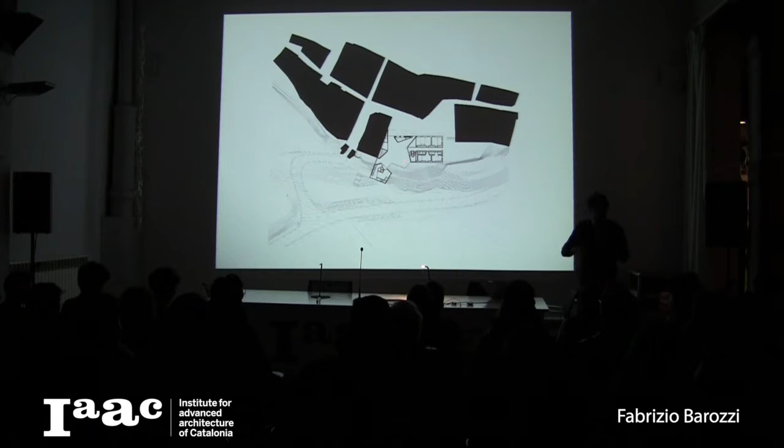And for sure, the other most important thing is that in the middle of the project there exists a public space, a plaza, a belvedere. I will show you more and speak more about this idea of public space.

From the distance, the project is very simple—just an archetypical element that marks the limit of the urban in front of the landscape. You have to imagine we are north of Madrid, in this meseta, in a very horizontal space where there are different towers, different medieval elements. So from the distance, the project is just a transition element, from the urban to the organic.

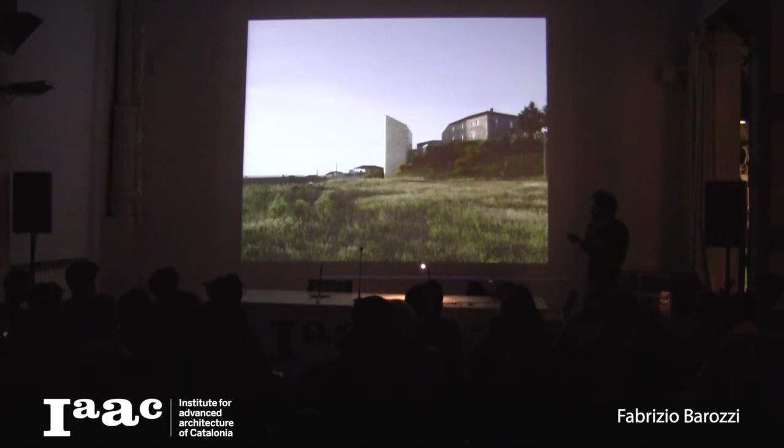What we try to do is interpret this very specific and singular condition of the landscape. With the new element and the old building—where the regulatory council is now, which we also restored—we try to build a fragment of this landscape, so that with the passing of time, the two buildings become a new fragment of this landscape.

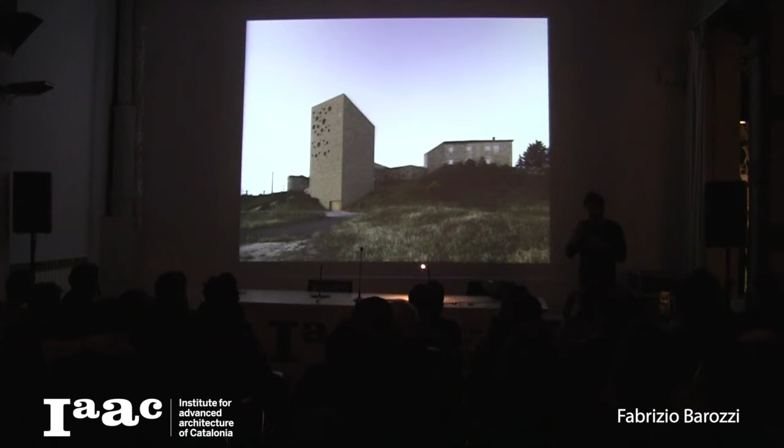If we turn around the building, we start to see clearly the extension and the pre-existing building, and this image makes clear what I've already said: the project tries to be very specific, very contextual, very atmospheric, but at the same time something extraneous from the context exists. The project is also an independent element that tries to forget the same context.

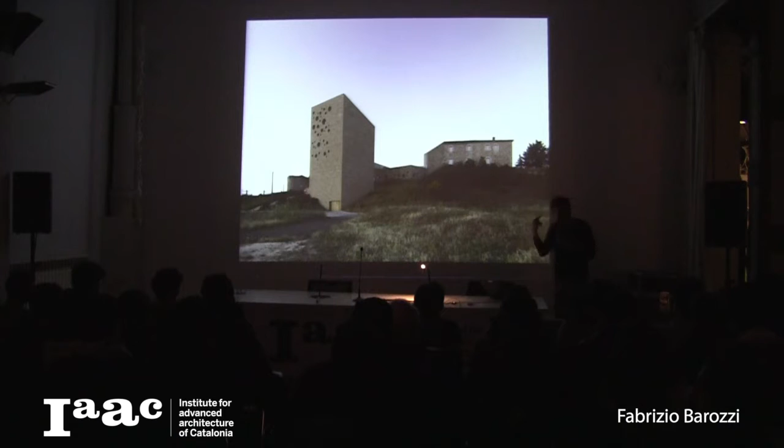So in a way, the project starts just here in the middle, where it touches the old pre-existing building, and becomes more and more autonomous, finalizing with this archetypical element. This is really an architectural translation of what I said before.

And if we continue to turn around the building, we discover that it is something more independent—just a landmark that establishes a tension with the horizon.

But the more important plan of the building is the plan on the top, where we can appreciate the old building and the extension. And what is very important to notice is that this is a private building.

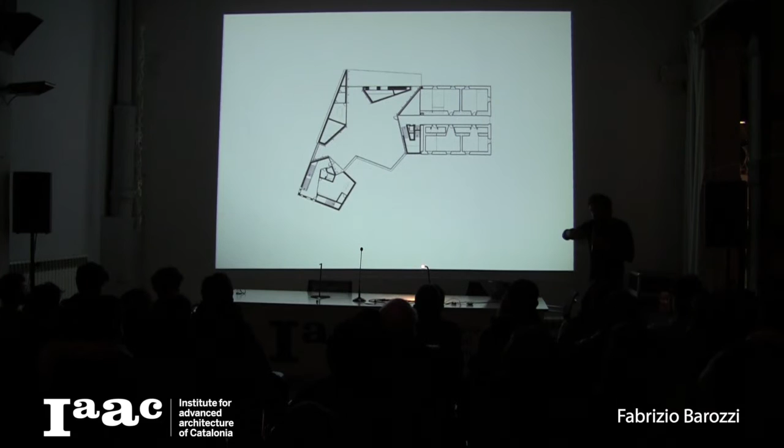But in the middle of the project, we do not build a building, but we try to define a public space, in a way where the architecture becomes just the frame of the urban. And this is this plaza. What is very important in this project is not the architecture in itself, but the void that the architecture can compose, and this public space on top of the building that links this private building to the town.

And this is also for us like a manifesto image, because all our architecture, all our projects are born from the modelization of the public space. All our projects are public buildings, collective buildings, and in a way it's very important to understand that what gives meaning to a project is the work in the modelization of the public space. The architecture sometimes is only the frame of the urban.

We are always, like in the other image, interested to discover new possible scenarios for a context. Here, the two buildings reveal a new possibility for this area, and some elements like this old fragment of a very old church become the skylight, to put light into the building.

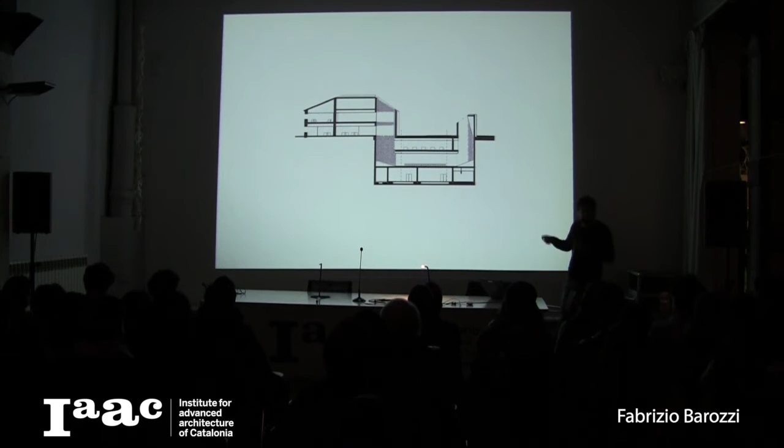The interior is very, very simple, very clear. This is the skylight in the middle of the ruins, where basically only the light conforms the space. And in this section you can see that—

I like this, so it's better. So these two parts, this element and this other element, this fragment that appears in the plaza, they are basically a very big skylight, to put the light into the building, like there.

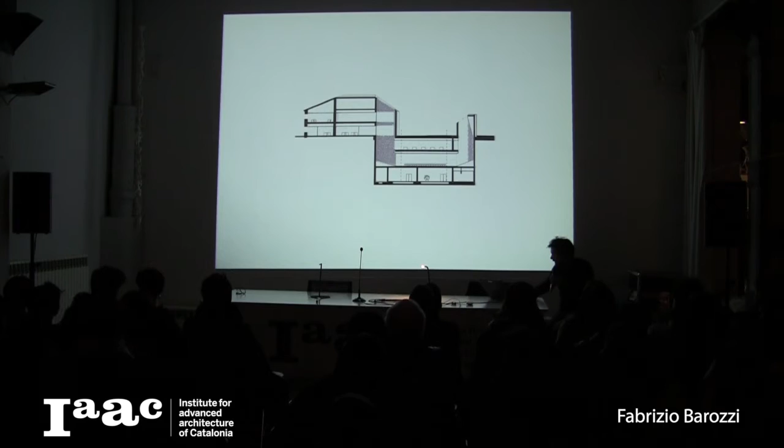And I have to mention that for us it's very, very important to work with the material, the materiality, for the project. In this case, the entire building is done in stone, but it is not a very thin stone—it's a wall made by stone, because the idea is to create a new building with the same gravity as the old one.

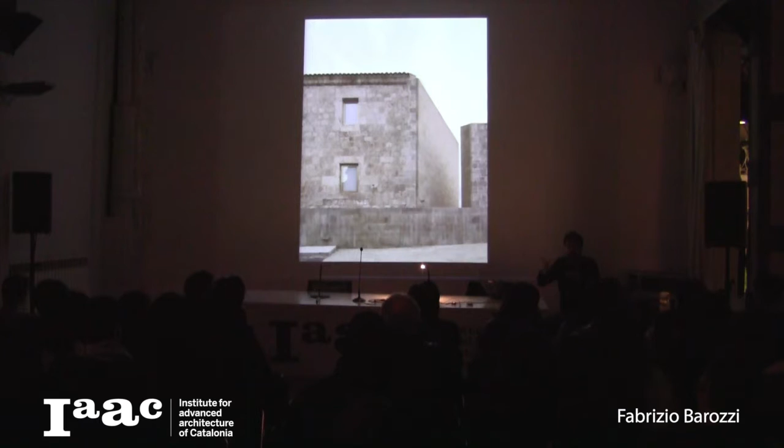And working with the material, in a way we try to improve a sensorial perception of an atmosphere. And also we can think about time, about how the building can be transformed during the time.

And after this project, we won another competition for a Philharmonic Hall in Szczecin. It has been a very long project—we won it when I was 30, and we finished it last year. So we worked on this project for more than 8 years, and in a way this project has marked our path, our way of working.

In the way this project marks also the next steps for the other projects. And this image was taken from our office there in Szczecin.

It's just a working image, but in a way it shows very clearly how this city is. Szczecin is a city in the north of Poland, very close to Berlin, just on the border with Germany, and it is a city that was completely destroyed during the Second World War.

So in the landscape of this city, there is a mix of elements. There appears some housing from the 60s and 70s, from the socialist period. There are parts of the old city. There are Gothic monuments and medieval elements, churches and other monuments, in this flat extension of the city.

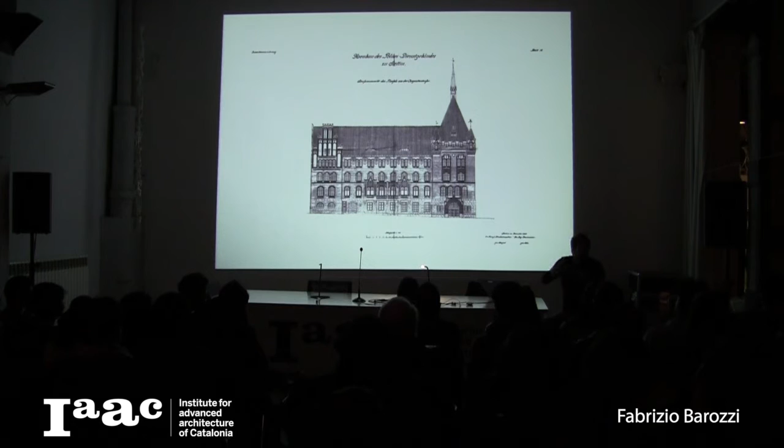But thinking on specificity is important, but it is not enough. Only an autonomous, independent thinking on specificity can discover an interpretation of reality. And this is our interpretation. This is something that has a very clear relation with a contextual situation, but at the same time is something that has a value in itself, that has sense in itself. There exist some internal rules that make this object have an objectual value in a way. So in a way it is autonomous, it is universal, but at the same time it is born from this local or contextual condition.

The Philharmonic is placed in an area close to the city center of Szczecin, exactly in the same place where the old concert house stood before it was destroyed during the Second World War. And it is the first step of a bigger urban program that tries to reconstruct, dynamize and reactivate this quarter, this part of the city that now is a little gray and without activities.

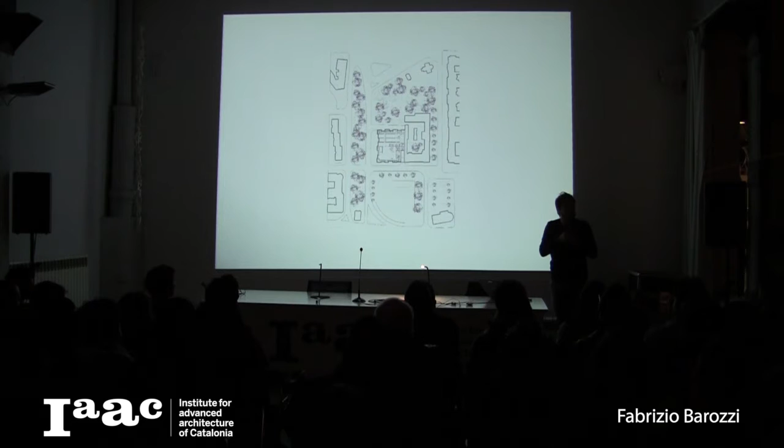The project, from an urban point of view, is very simple. It just marks a corner. The project fills the entire plot that we had during the competition, and with this simple idea to build a corner, it's a first step to try to reinforce the urban ensemble. We were conscious that this Philharmonic is just a part of a bigger construction, and the bigger construction is the city.

So in a way, all the elements that conform this project are born from a dialogue with the city. All these elements that appear in the neighborhood also appear in the Philharmonic. The Philharmonic speaks about mass, it speaks about verticality, it speaks about repetition, all these elements that are identitary for this context.

And we also try to dignify this program, a collective program, a social program like a Philharmonic, through a stark monumentality in a way. There is something monumental in the building, but it is also stark, also povero, poor in a way. So this monolithic building appears complex, but it's very simple. It's composed by a repetition of a very simple element that with slight displacement conforms a wall.

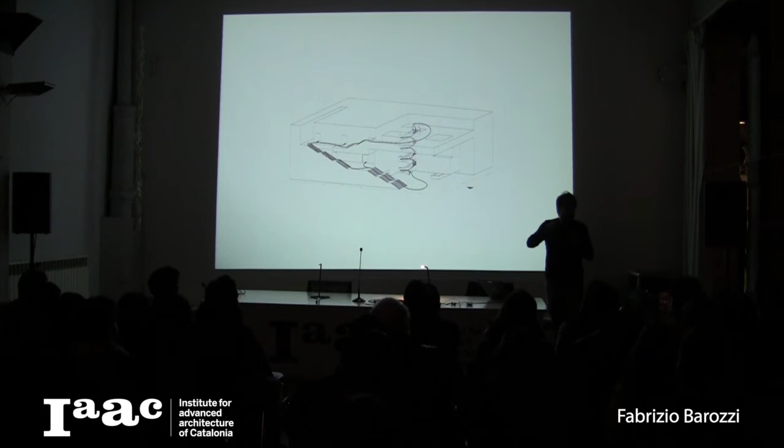We try to make the building easily understandable, so when people enter they can perceive and understand how the building works. All the public spaces on different levels are connected with a loop that lets people move around. So the foyer is basically a covered plaza, an inner public space linked with the exterior plaza, and it becomes a very open, social space.

This space is formed by three elements: the stairs that show the movement of people inside the building, the light that comes down from the skylight, and the two symphonic halls that mark in a very clear way the limits of this space.

What is important in this space is not the architecture, but what happens inside it. When people arrive, they give activity to the space, and in a way the architecture is just the background of the activity of the people. This is what is important.

Finally, architecture can be conformed in different ways, but the program, the activity, the way of use that it permits, is the key point of a public architecture like this Philharmonic. So we try to solve a very complex program in the simplest way. As I said, we try to be very synthetic.

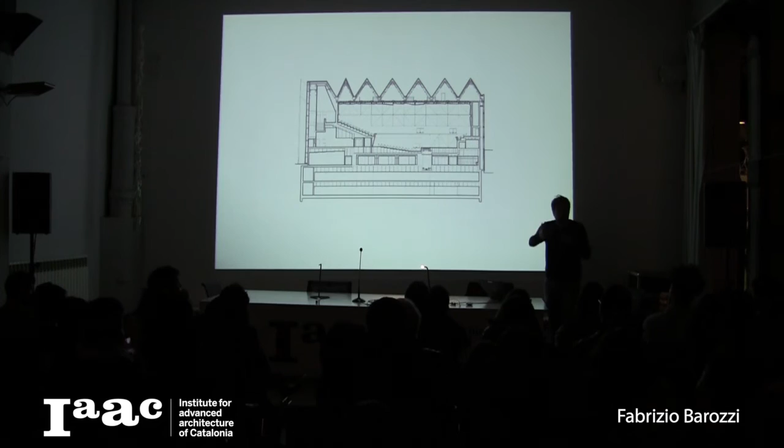We also started thinking that starting from a detail, an ornament, maybe we were able to conform the entire whole. Working with this idea of ornament is also a link with history, with a tradition. So we start with a detail, but also with a very unusual material like the golden leaf for the finishing of the whole.

The challenge for the design of the concert hall was to link ornament and technique. If we are able to link ornamentation with a technical function, it is not a decoration, it's something more than that. This is the ceiling of the roof. All these planes have a very precise acoustic function. In a way, the concert hall is basically an ornamentation on a big scale, on a large scale.

Starting from a detail, we compose the entire building, and there is something in continuity with history, but transformed in another way.

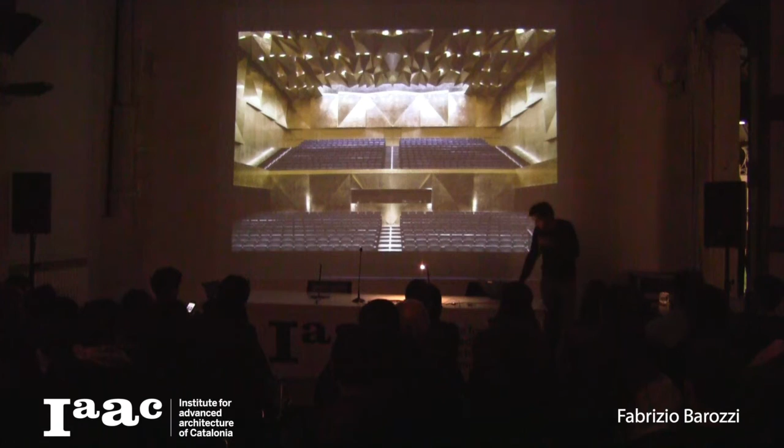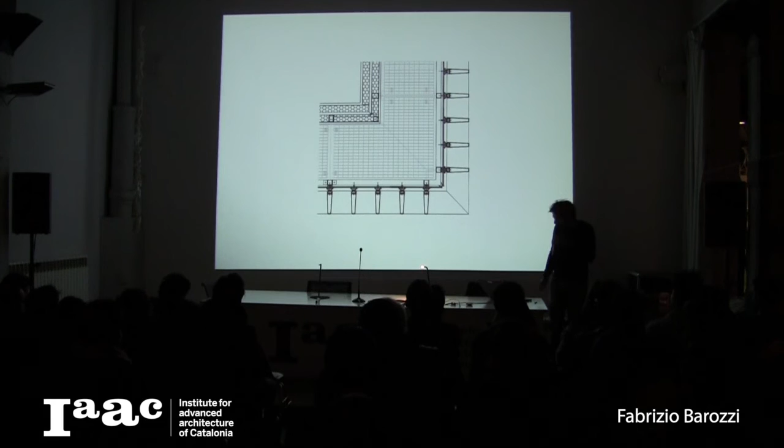And the facade, in a way, is also an ornamentation. It exists, it's very simple. There is a glass wall here and some aluminium elements in the facade, painted in white, and the insulation is there. This simple composition of the facade permits perceiving the building in different ways. It appears very monolithic from a certain angle, or lighter if we see it from the front.

It is also a facade very sensitive to the change of light. It depends—some reflection appears in the image. It's a bit difficult to understand, but it depends on the light and the perception, the materialization of the building.

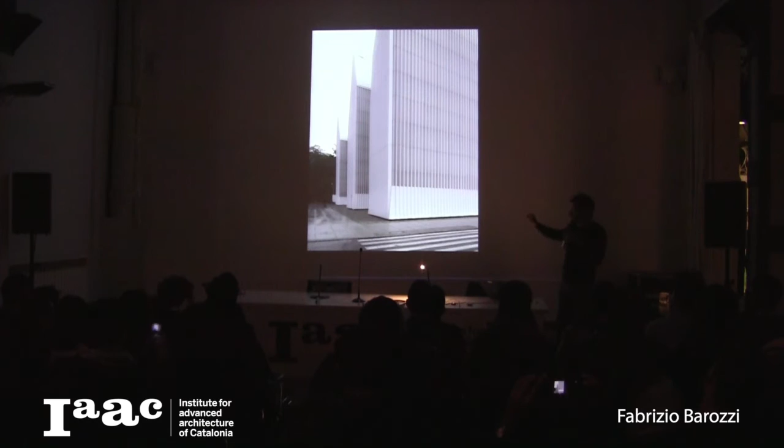It changes radically, and there is also a very smooth sophistication in the facade. There is a plinth to join the slab with the ground floor, and the section of this slab is thinner, which permits to control the link with the sky.

And when the evening approaches, the building starts showing its duality. The facade starts to work with light. The perception of the building changes, and in a certain time, the perception of the building changes dramatically. It appears lighter. It expresses the activity, the inside activity.

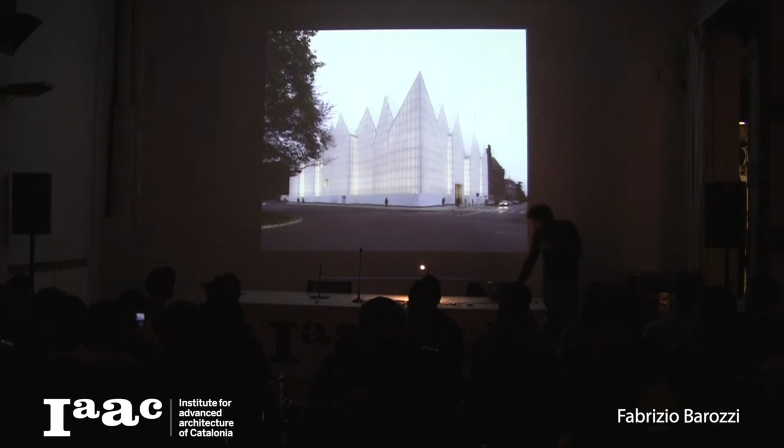And through the modification of the intensity of the light, the building permits to invite people to enter, and when the night arrives, only the light marks the building in a way. And so the transformation of the building is complete.

But what is very important of this building is, in a way, not the architecture. It's that after more than 8 years of working, the city came to understand that it was an important building for the city, a social building, a public building, and the people can use it during the entire day. And I think that was the most important thing of the building.

It's really the first step of a more general reorganization of a part of the city. And if a building achieves this condition, that is the most important thing. It's what gives sense to our work in a way.

So I will show you now more quickly the three projects that we are doing now at the office. Some years ago, we won a competition, a very important competition for a cultural quarter in Lausanne, Switzerland. In the city center of Lausanne, we designed a master plan to put there the three principal museums of Lausanne: the Fine Art Museum, the Design Museum, and the Photography Museum.

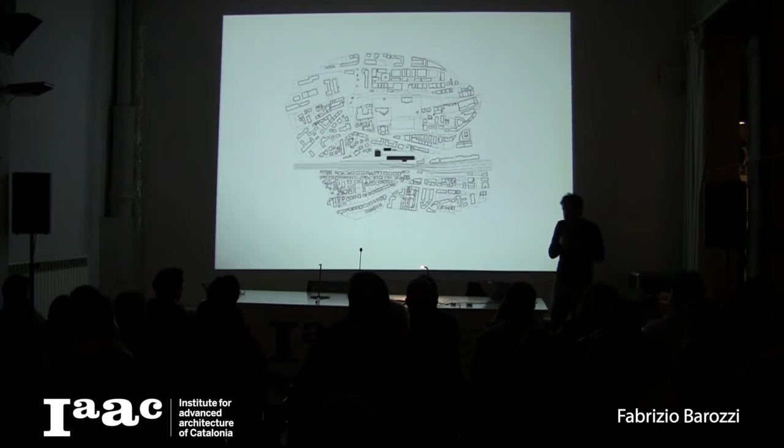The site is a huge site. It's all this site here, just in the city center. And there are different industrial buildings in the middle, and the central building, it is an old building from the 19th century, and the crucial point was also to discover how to work with this existing building.

So this is the actual condition of the site, and to do this project we worked for many months, I don't know, 4 months, 5 months also, and we were able to design the project when we started thinking that it was more important to establish an urban strategy than thinking only in the architectural object. So when we started thinking of the project in this way, we proposed this new diagram where...

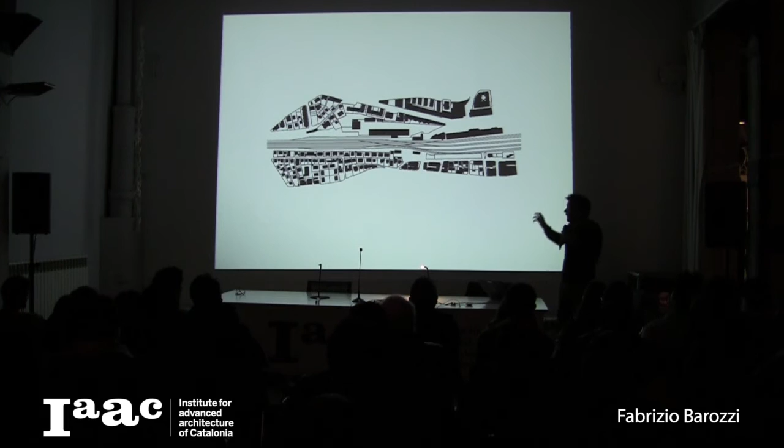...the core of the project is not the three buildings, but is this new plaza right there, that is connected with the plaza in front of the train station there. And in a way, this simple scheme permits to link this big part of the city to the city. And so after that, the project was very, very simple.

Like in the first project that I showed, the architecture is just the frame of the urban. Nothing more than this. What is important of this image is what's happened here: this new esplanade, this plaza, that permits to conform a public space, and the three buildings are just a frame. But again, the Musée des Beaux-Arts, the Fine Art Museum, the biggest museum, is still something very, very specific for this condition.

Because it tries to interpret this industrial condition. It's a container, very rigorous, very pragmatic, very hard also. It tries to establish a link with a certain atmosphere. Thinking on specificity for us means also being able to link a certain architecture to a certain place in a way. And so it is specific, but it is also at the same time something more autonomous, that has its own internal rules that give it sense by itself in a way.

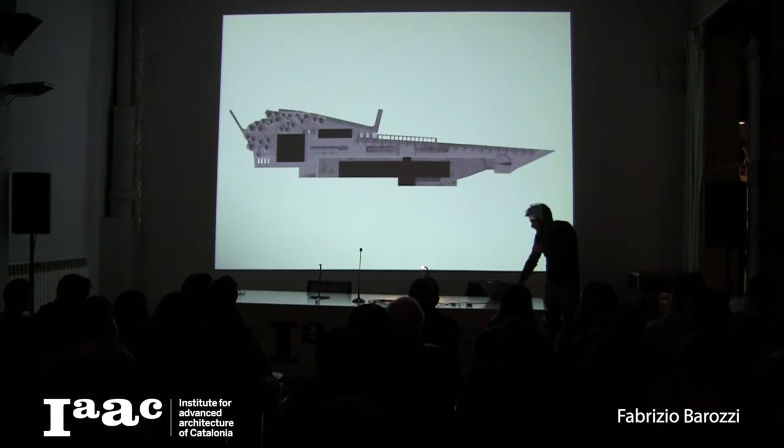So this is the general master plan. And what is also important, to open this urban condition, this urban scheme, we decided to demolish a big part of the old building. It was a very radical decision, but we started thinking that to preserve the memory of a place, it's not necessary to preserve the entire building. Maybe we can work with a different fragment.

With an association of different fragments that permit to establish a more intellectual link with the memory of a place. So, following this idea, we preserve a very small piece, a very small fragment of the old building, but it became the most important compositional element of the new project. The new project and the fragment establish a very classical relation.

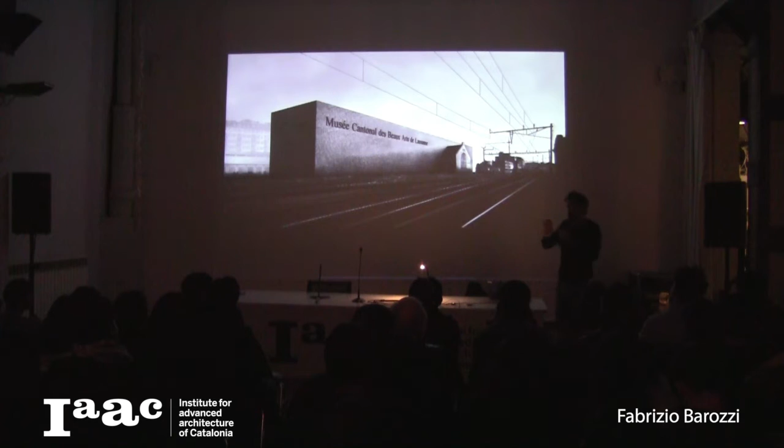There is a background - the museum is a background - where the fragment, the pre-existing building, is the figure put on the background. From the side facing the railways, the project is very closed, to protect the art collection inside. From the other side it is more open, more permeable, to try to give activity to the urban space.

The ground floor is very public. It's an inner extension of the outer square. There are the cafe, library, and so on.

But what is important to notice is that the relation with the fragment is not anecdotal, but something substantial. The foyer is there, and it's conformed there from the pre-existing building, and it is the element where all the building starts in a way.

These curved windows, which for us were the most emotional element of the pre-existing building, from the interior are transformed into something new. But it is still the main important compositional element of this new foyer.

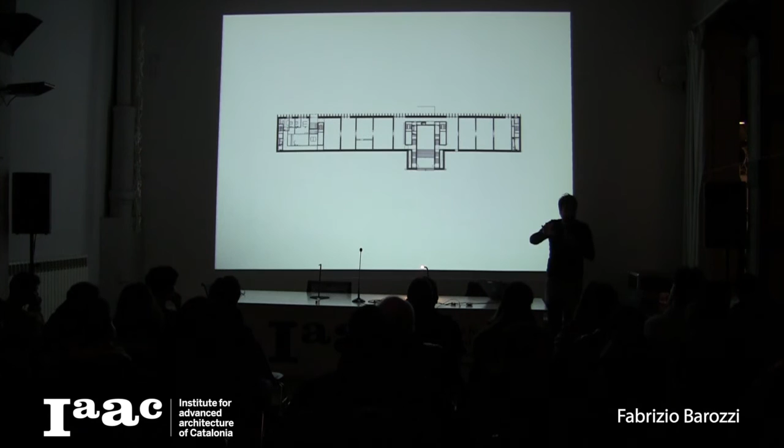All this, then the project is very pragmatic, super pragmatic. From the right, temporary exhibition. From the left, permanent collection.

The stairs, upstairs, and upstairs we, like in the project for the Philharmonic, discover this idea that we try to solve a very complex project. This is a very big museum where you can imagine the different programs in a very simple way. All the building conforms only with 5 cores that conform the structure, the construction, divide the program, and also conform the form of the building.

So in a way we still try to be very synthetic. And this is the upper floor, with the natural light coming inside.

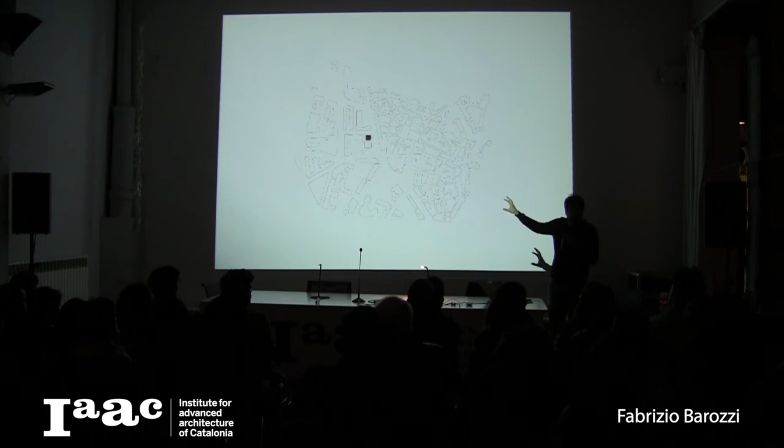Only 9 months after this competition, we won another competition, again in Switzerland, for the extension of the Fine Art Museum in Chur. Chur is a small city in the Graubünden region, south of Zürich. And the image is not so good, but the project plays on the limit of the historical city.

This is the museum. The collection of the museum is hosted in this building. And to understand the project, I have to say, to notice about this building: it's a beautiful building, but a little bit strange, because it is an 19th century villa built in a neo-Palladian style. It's an interpretation of the Rotonda by Palladio, but there exists an oriental decoration. It's impossible to see it in this image, but here there is some decoration also, and here at the entrance there are two sphinx.

In a way this oriental condition, I think Peter Zumthor has also interpreted or worked with it, because in 1982 he made the two winter gardens, this extension here and there, and also transformed the basement into exhibition space. He built something, I don't know, Japanese in a way. It's very simple, very clear. There is a repetition of this vertical element.

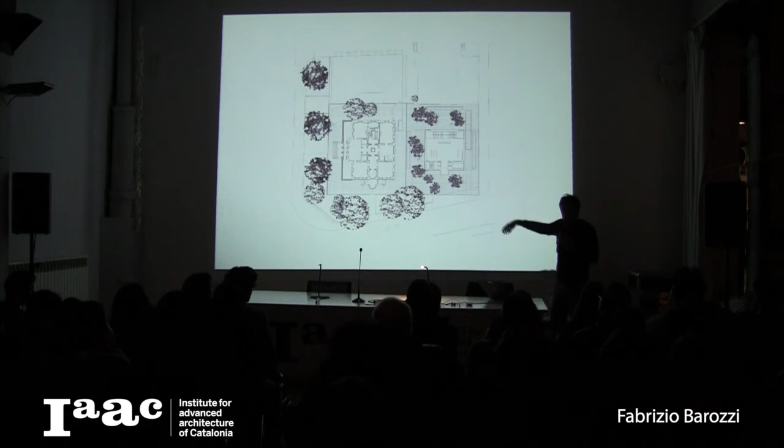And this is the project. In December I have no picture of the building, but it's finished. I can see that there are two themes for this project: there is something Palladian in its central plan, but it's also related to this oriental decoration that forms the original building. So it's something very specific for this context.

It was born for the interpretation of a very singular condition, but at the same time the new building is very autonomous. It has sense by itself in a way.

Programmatically, it's very clear. Again, we discovered the potential of the urban because we proposed to put underground the exhibition spaces. There are the permanent exhibition spaces, the temporary exhibition spaces, technical elements, and outside it appears only the public program: foyer, pedagogical spaces, atelier, and so on.

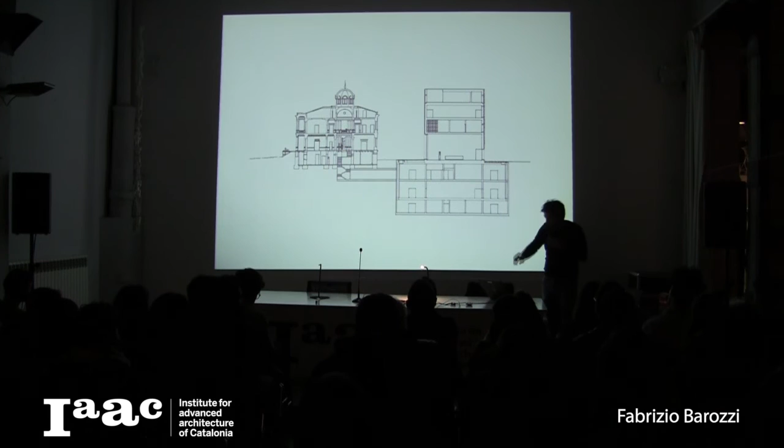And the link with the old building is made underground. So this intimate relation with the existing building appears also in the foyer, because the facade of the old building is the facade of the new one.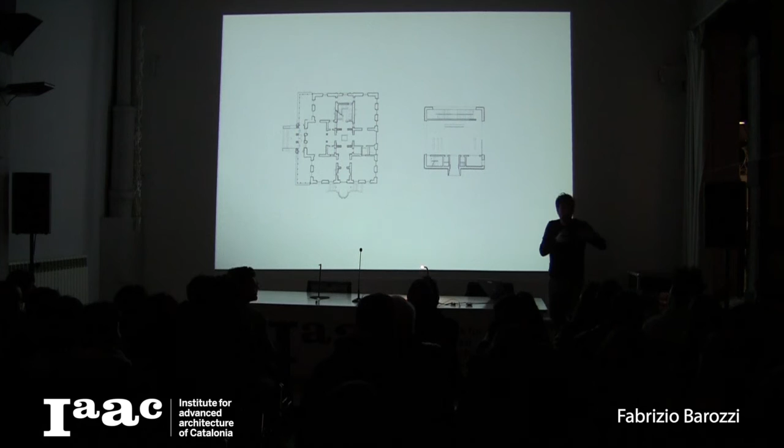The project is super synthetic, made only with two cores, and that is all. The central foyer establishes a very geometrical relation with the pre-existing building, and again we solve the complex with a more pure scheme.

The stairs go down, and the internal spaces are very classical, to expose a very beautiful collection with artificial light. This was possible because of this type of art collection that they have.

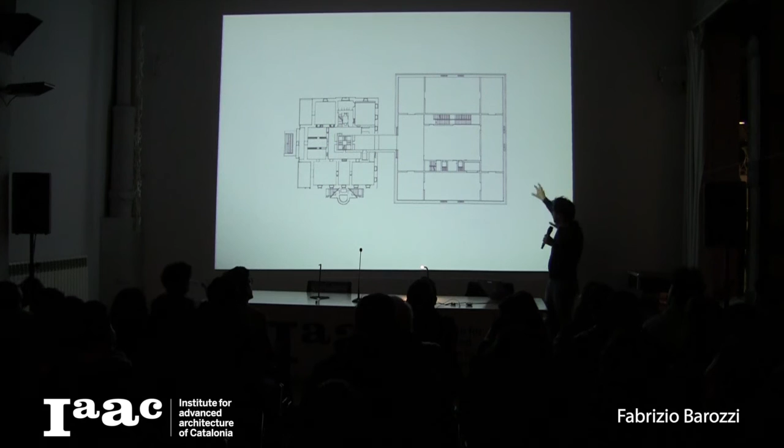The first basement has the sequence of this very simple and well-proportioned area, and in the second basement we discover again where it is just a structure. There exists only the two cores, and the interstitial space is for temporary exhibition.

So again, there is this idea to dignify also a collective program like that, through this idea of working with monumentality, with a stark monumentality.

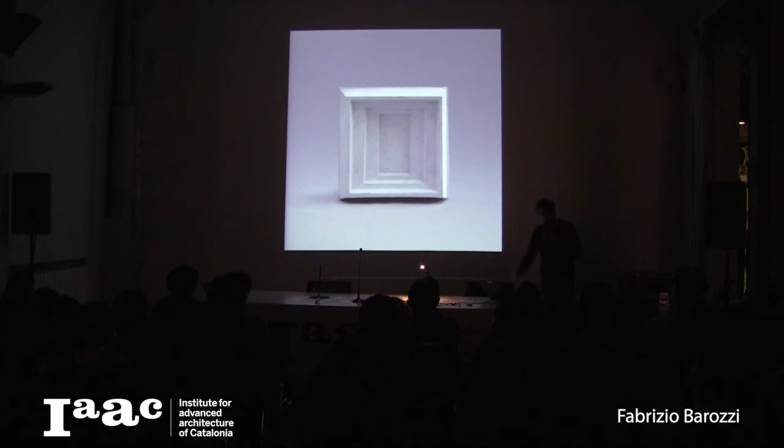And the facade is very complex. It's basically a bas relief that forms the entire facade, composed of small concrete elements, 50 centimeters by 50 centimeters. It's a prefab element. Here in Switzerland it is possible to do that. We try to take advantage also of the technical knowledge that exists there to work with concrete.

And the last project I show you is another project in Switzerland, for the Dance Academy in Zürich. This is the context, a very interesting area. The site of the project is there, outside of the picture. This is the Limmat River, the principal river that crosses the city.

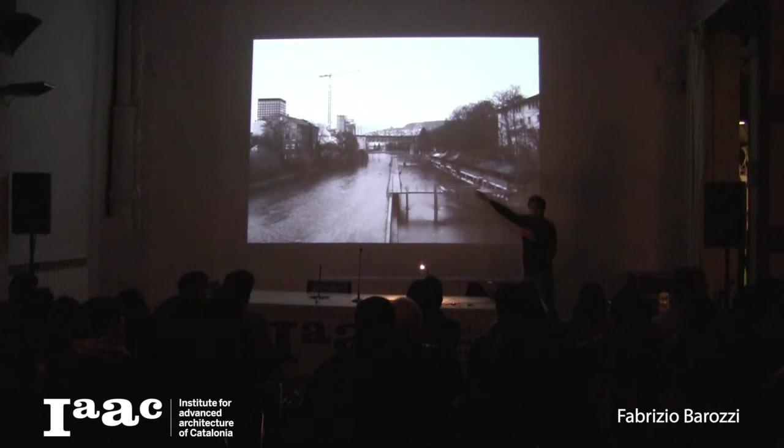And it's beautiful, this area, because it's a mix of elements. There are modern towers, infrastructural metallic elements, bridges, silos, a factory, an old establishment with a natural swimming pool there.

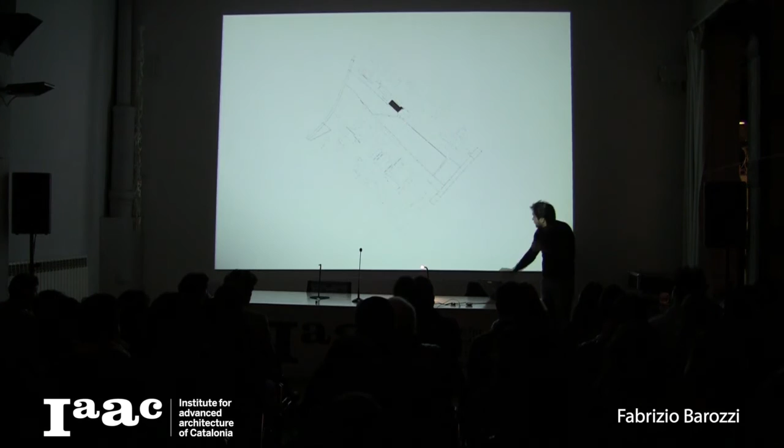So what we try to do was again interpret this condition, and the project is placed just on the side of the river. Still, in all the projects I've shown you, they try to mark an urban presence, but sometimes a project should also step back in a way, and it is the case of this project.

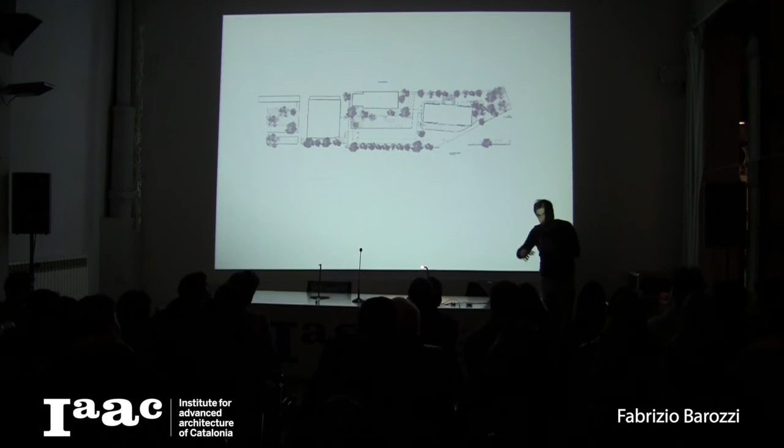The project exists, but the three elements that appear are the existing building. In this case, for a contextual condition, we decide to not build a building, but a public topography.

The project is just a plinth, a socle, for the existing building. And we transform a private area into a public one.

People can move on the roof, where the garden appears, also on the first level, but also in this walk along the river that is now a very dangerous area, and we try to reactivate this area too.

Also to put the foyer and entrance of the building in this part, and not here linked with the street.

So the building is just a plinth and this urban topography, and what we try to do is, I don't know how to say it, build an urban scenography.

The project just marks a facade along the river. It is a terraced element, a public element, and a concrete element made by a serial and obsessive repetition of an element, like in this industrial and infrastructural element that appears in the context.

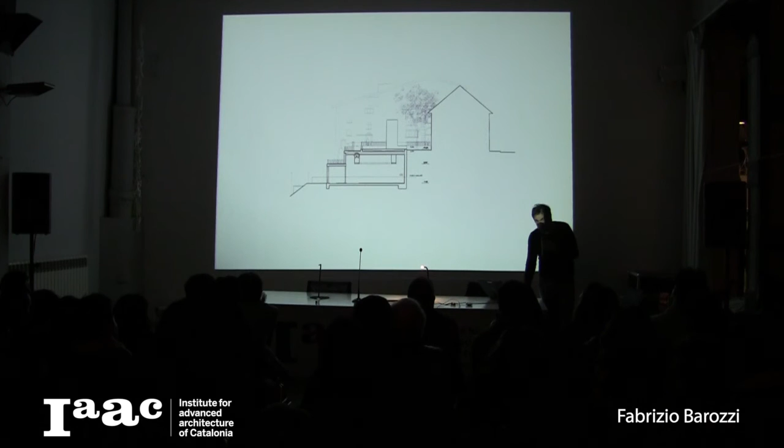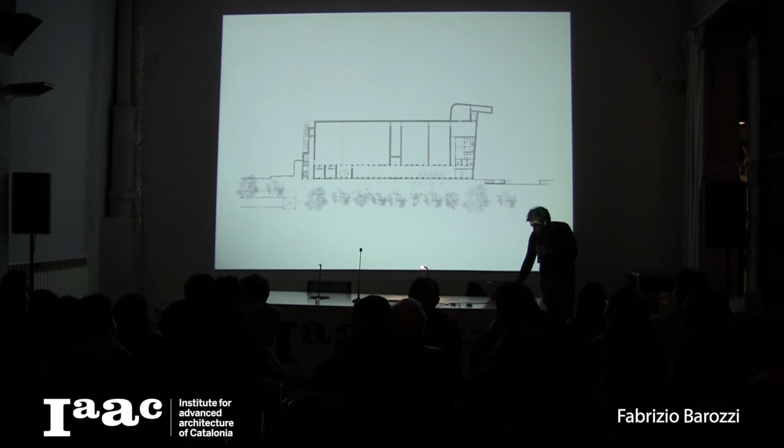Again, it's something very pragmatic, because this section permits to put the program in a clear way: the administration, the study for ballet, the foyer, but also to host the big studio right there. The first floor plans are not very simple, but it's not important, and the ground floor with the foyer like that. The foyer is a public space, very clearly linked with the exterior space, and it permits to try to reactivate this part of the city.

And all the build—I hope that with this presentation you can perceive what I said during the introduction. We work in a paradox: we always try to do something that belongs to a place, but at the same time belongs to all places. With this I have finished, and thank you very much for your attention.